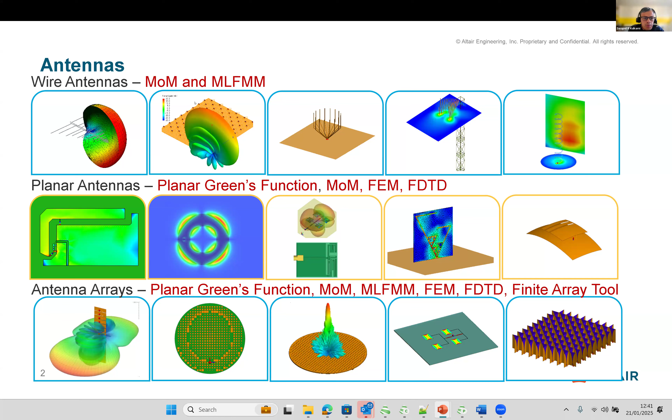These are more realistic antennas, I would say, right from your reflectors. Bear in mind that even today, most satellite communication is heavily reliant on waveguide, because you inherently have to pump a high amount of power down to Earth and vice versa when it's received, in order to amplify. Of course, patch antennas are definitely used, but they have very limited and restricted usage, and they're preferred only in certain frequency bands.

So you might have heard these terms, payload and other stuff, but inherently the satellite is designed for a certain payload. Payload is a very generic term - don't mix it up with the actual weight. It essentially caters to what bandwidth is going to be used, with what frequency.

So you might have heard that some of those are GEO, LEO, or geosynchronous satellites, etc. However, each of them will cater to a specific band: S band, C band, KU band - or different KU bands may not be used, my apologies - but VHF, UHF, yes, they are used, and then X band is very common. So based on the payload, the bandwidth, and the frequency it's going to cater to, and whether it's purely for a civilian approach, surveillance, or military.

Yes, different kinds of antennas will be used, but by and large, this is a fact that at least in SATCOM, and even on the receiver side, you'll still find conventional antennas. Of course, a lot of innovative engineering has been deployed, and there are different numerical solvers used to design and simulate. You of course have to move at the end of the day to fabrication.

That's a different aspect - I'm not covering the fabrication part because I have very little experience in it. I did a lot of designing and fabricating actual antennas in the earlier days, but now I've lost a bit of touch, so being very transparent and honest about that.

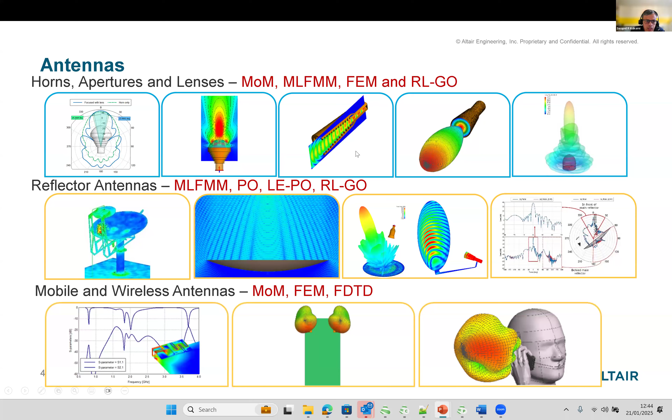Let's move to a more realistic term. It's a known fact that if you design something, unless you are a very good designer or engineer, your specifications rarely match the exact end requirements. So you will have to optimize it - work out certain design variables and see how these things fit into the real world requirement.

Let's take a classic example of a basic element of a satellite, which is an antenna. It doesn't matter what it is - are you looking at a patch, an array, a simple dipole or a monopole? That doesn't matter. What you typically do when you design a system - let's say even if it's a rectifier or a power converter - the reason I'll cover this, going off topic a bit, is very few people are aware that in satellites, power management is very critical.

If you are aware, most of us are, that everything runs on batteries. But have you ever thought the battery - the critical, I won't say brain, but the neural network of a satellite is the inverter circuit. Essentially, the batteries or solar arrays harness the solar energy, it's a known fact, and then charge the battery, and the battery powers the whole system. The key fact is the battery is standardized at a certain voltage, depends, 48 volt or 24.

However, none of these digital or analog circuits or other devices on the satellite operate at 48 volt. You need a power converter. A power converter is the brain of any electronic instrument. For example, take your simple handset - you need to charge this, you probably plug into your AC mains, and it has a small power converter.

Another interesting application I've seen is an alternative to conventional propulsion. I'll touch on optimization later, but just a couple of things on where the technology is moving. When a satellite is launched into orbit, it always drifts, so you have to fire thrusters to bring it into the right orbit so it looks at the right receiver station on Earth, or covers specific areas. The classical way uses liquid oxygen propulsion jets, but this is way more innovative. A couple of satellites have already started using this. I won't name who, because of NDAs, but what you're observing is essentially a high power microwave antenna. It ionizes plasma and uses it as thrust. It vectorizes this plasma through what is essentially a waveguide cavity antenna, but high power. It ionizes the plasma and uses it in a direction to thrust, propel, or change the direction of the satellite. It's quite innovative because you don't need to carry any liquid or solid propellant, and it's energy efficient.

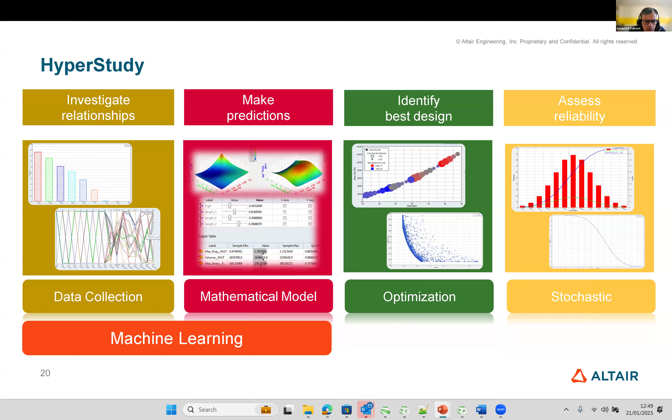Let's move on. In the interest of time I'm going to skip some things and jump directly to an example. There are a lot of jargons, but I'll go straight to machine learning, specifically in the electronics and electromagnetic domain.

You might have heard this term here and there, but the question really is: what is it?

Sorry, any noise or questions? My apologies, is it just me, or is anyone hearing background noise? Okay, that looks fine now.

Instead of using complex terms and jargon, I'd prefer to work with a simple example to understand what machine learning means in this context. I don't want to use the regression model and everything. Give me a couple of seconds, I'm just going to skip this.

Let's take an example of a very simple, basic antenna. Doesn't matter at what frequency. A patch antenna, since people nowadays fancy them a lot. But believe me, in the real world patch antennas have very restricted bandwidth and limited usage. Not that they aren't useful—if you're looking at low power and medium range devices, you'll find them everywhere. Rolling back, let's say you've designed an antenna.

I'll also come later to a circuit example, and it has some XYZ performance. When you design something, you have design variables. These could be anything: the physical dimension of the structure or electrical parameters. For example, if you're designing a Colpitts oscillator, you're looking at your resistor and capacitor values, or your required output, your sample, how you're looking at the square wave, the sampling rate, etc. Similarly, for this antenna, there are design variables: the physical dimension as well as the electrical or electronic parameters. It could be things like what is my transmit power—let's say this antenna is radiating 30 watts of power, for the sake of argument.

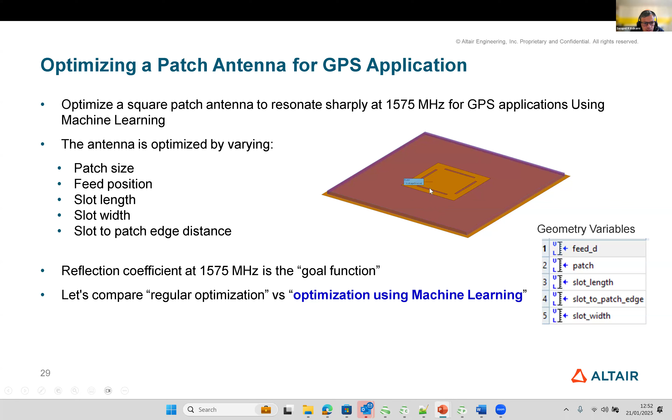Rolling back, this design has a couple of design variables, which is the patch size—the length of the patch, width of the patch, and where exactly the feed position is. In the real world, most antennas are coaxial fed. It could be fed through a classic coaxial feed, or using an SMA or BNC connector, whatever—that's not the point here. What you're looking at are the dimensions of the antenna: the length and width, or the length and width of the slot, length and width of the antenna, and the slot-to-patch distance. Now, when you do an optimization, you can use different tools.

We have something like HyperStudy, but you can find any tool which does multivariable, multi-parameter optimization. This is what the industry looks at or is in practice. What we want to look at is, out of all my design variables, which of these have maximum impact on my design.

So in this case, you prepare your CAD model of the antenna and give it to HyperStudy, whatever tool. You just say, please do a design of experiment. DOE is nothing but you launch multiple simulations, or you can do multiple calculations by hand or by MATLAB, either way, or use a simulation tool.

It's entirely your call. And what it does, with a number of calculations or simulations or your own MATLAB code iterations, it essentially does a wide variety of combinations of values of design variables, be it patch slot length, slot width, patch dimension, or feed location.

So you can imagine if you have just two design variables, you have a matrix of 2 by 2, which would be 4 simulations, or 4 hand calculations, or 4 of whatever MATLAB or code you want to use. Now imagine if you have 5 design variables, your matrix should be at least 5 by 5, isn't it?

So you will have at least 25 designs of patch antenna, wherein you will have different dimensions of patch size, slot width, slot length, etc. What the optimization engine does is tell you, look, out of all these 5 design variables, there are only 2 which have maximum impact on my S11 or return loss. The other design variables have least impact, just ignore.

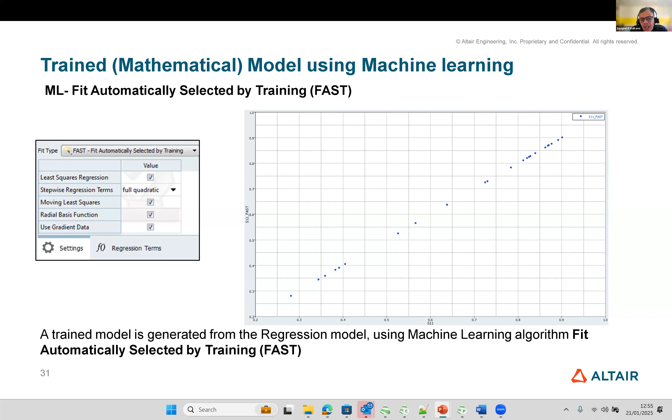Let's say you can argue that we already have an existing antenna system or a transceiver, and this is how it has performed. You can come back, get the measured data, feed it into the optimization engine, and what it does, it will train. Let's keep it simple. It will train the simulation data and generate a math model, and that is the fancy term machine learning.

But essentially it's a simple math model or mathematical equation. The mathematical equation is prepared based on extraction of data from your simulation model, or your hand calculation model, or MATLAB, or whatever you use. And what it does is generate a response surface from your machine learning model.

Essentially, it will generate a response surface and show you, okay, if I change the feed position, say from 18 mm to 25 mm, if I change the slot length from say approximately 40 mm to 44 mm, if slot width from 1 mm to say 6 mm, how would my S parameter look?

And then it will give an idea that probably just by moving the slider, instead of doing full simulations, because now it has generated a math model based on your number of simulation models, it's very easy merely by moving this slider to identify what optimum value will give the best S parameter.

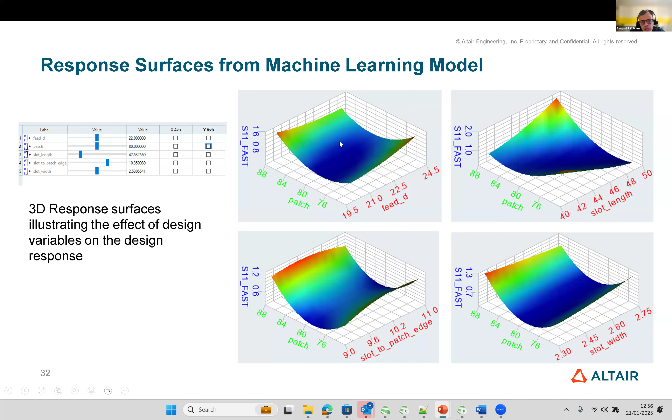The key aspect to remember here is machine learning or data science is not magic. It is purely a mathematical approach. Remember, it takes time to solve say 25 models with different dimensions of your designs. In this case, it's a simple patch antenna. So obviously you spend a finite amount of time to solve those models and then extract the data from those solved models. So you might feel that it's magic, but it's not magic.

If you do a conventional optimization, you could see it will take probably 8 to 10 seconds because it's a very simple patch antenna, and believe it, this is on an infinite ground plane. None of your real world structures are on infinite ground plane. Unfortunately, the textbook learning, what I learned, even that has changed.

All of the examples they talk about show very nice, beautiful responses and curves, but they are mostly based on an infinite ground plane. That is never the case. All of your real world antennas will have a finite ground plane, and it's very important to consider this when you design or solve for this aspect.

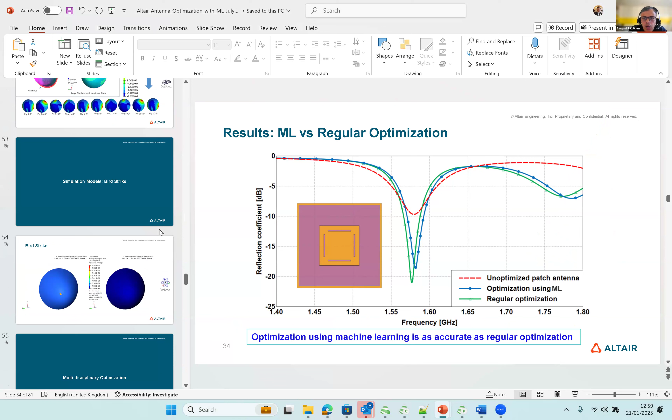I'm going to stop here in the interest of time, but that's what I wanted to cover: how multivariable, multi-parameter optimization is used to achieve real world results. Now I'm going to minimize this and move on to the next topic. Bear with me for a couple of seconds, which is critical because I have to cover that, and then, in the interest of time, I'll cover some other stuff.

Here I am. Yes. So the other aspect, before I move to satellite connectivity, is how does satellite communication work?

One would argue the signal is relayed from a base station antenna up to the satellite, and if it's within the range, coverage area, or what we call footprint or power flux density threshold, the signal will be directly transmitted. If not, it will be relayed to a second satellite and then down to the Earth's surface. Unfortunately, things are not that easy.

There are different tools available to define satellite networks, but you need to first understand how propagation occurs within space. Your signal gets attenuated at different levels based on what frequency you're using and what kind of satellite network you're dealing with - is it LEO, MEO, GEO, or GNSS. With GEO you're talking about 36,000 kilometers away.

That's a different story. But in general, the signal is relayed from the Earth's surface, say point A - any location A or XYZ - up to space and down to your receiver station. There could be a case where more than one satellite is involved, for long distance communication like transatlantic calls, which is very common these days with people traveling. If someone initiates a call from one location and it needs to reach somewhere in Germany, obviously it's not a single point to point connection - your signal will be relayed through at least one satellite network to another.

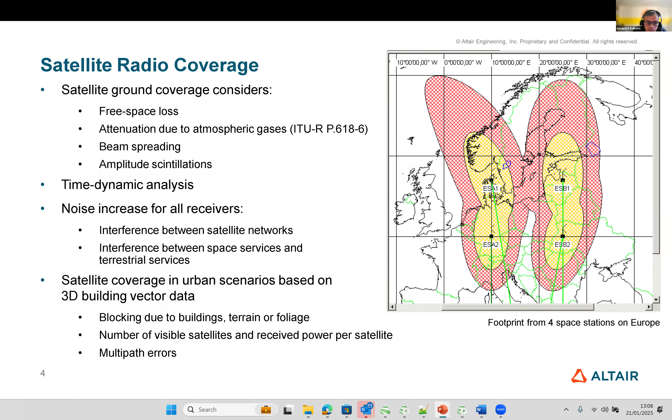Remember, when you transmit a signal and it's relayed down to a desired location on Earth's surface, it's not through just a single path. It's sent through multiple paths and then, rolling back to multiplexing, is made into multiplexing and demultiplexing. That's what occurs in real world communication channels. So multipath errors are bound to happen. How are you going to tackle that? There's a lot of industry focus on how to tackle multipath errors and reduce noise. Those could be other topics.

Another aspect people clearly ignore is that look angle is very critical in satcom. The look angle is essentially the angle at which the satellite looks down to the ground. If it decreases, obviously the distance between transmitter and receiver increases, and your path loss will increase as a result.

You want the least amount of path loss. Path loss, I hope you're familiar with this term, but it goes literally by its name. Let me make it simpler with an acoustic example.

When you speak, however high, a human voice has a limitation. I can speak at a certain magnitude, I can raise my volume, I can go to the peak beyond which I can't shout louder. So my voice would travel maybe 200 to 400 meters at most, and after that it ceases, it dies out. The same occurs with real world wireless or electromagnetic signals. There's a path loss associated. Your signal may reach beyond a certain number of kilometers, but if it falls below the noise floor or noise threshold, it's just noise. If your received signal strength is less than minus 90 dBm, it's just noise.

You can't demodulate or decode the original information back — it's just lost. Another aspect is the distance between the satellite and Earth station: if it increases, your path loss logically increases. What if your angle decreases? Then your signal path will increase. So there's always a golden balance you need to strike on the look angles.

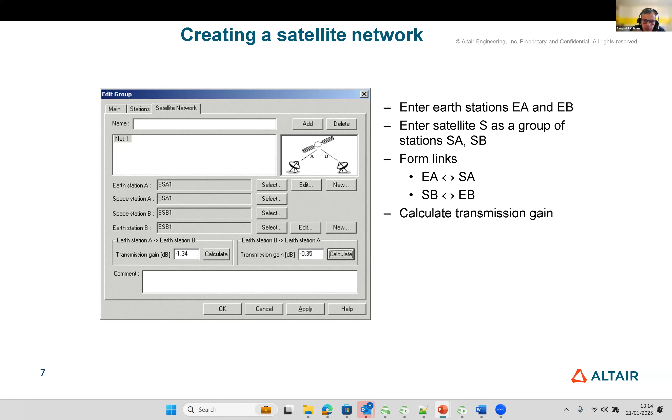You need to be mindful, first of all, to define things like: what is the transmission gain? What kind of satellite am I defining, is it GEO or MEO? What is the transmit power? What frequency band does it cover, etc. So you need to populate that information first, and then it will help you calculate the transmission gain, and so on.

I think I need to cover the space-Earth propagation aspect. There are a lot of losses, I'm talking in context of satellite networks, how they operate and what aspects you need to consider. Free space loss is inherent and occurs everywhere. Attenuation due to atmospheric gases. I already talked about beam spreading. What's important is there are certain ITU standards you need to follow if you want to implement your own codes, or even if you're just using off-the-shelf tools.

When it comes to space to Earth propagation, I'm saying now downlink. Uplink is where you send a signal from, as it goes by name. But again, it's not a hard and fast rule. Some people, or certain engineering nomenclature, argue that it's not hard and fast that an uplink signal should always be from Earth to satellite, and downlink could be vice versa. So I can't take my words back, but just be very clear that I'm talking right now more to downlink, which is space to Earth.

So you need to identify whether the space station is visible from a point on Earth, and how the refraction is tackled. Then there is a very specific ITU specification for diffraction, which is very valid because your Earth surface is not, yes, I mean, we all know Earth is not exactly spherical, but it's slightly flattened at the top and kind of an oblate shape. So yes, there are certain formulations.

When it comes to satellite coverage, what we really look at is the footprints. Bear in mind that a satellite covers a few hundred to a few thousand square kilometers of area, not a tiny bit. In that case, the way we measure the coverage is in terms of power flux density contours.

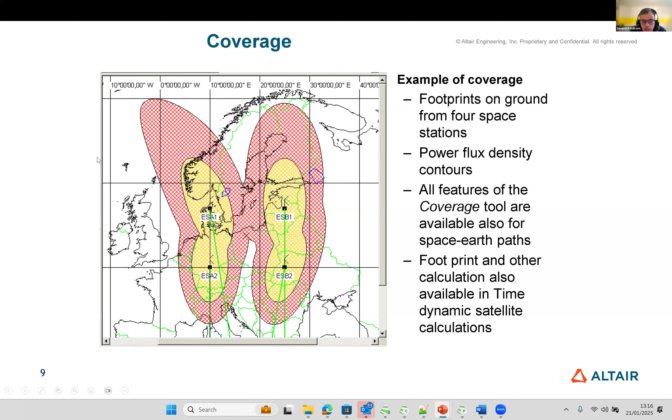Okay, so we have some coverage tools. The footprint calculator is available in static condition as well as time dynamic. When I say time dynamic, what does it mean? Hold on, before we deal with anything, I just want to run a simple, more realistic example.

What I'm showing here is I'm trying to solve a real world problem wherein I want to deploy a receiver which should handle the worst case scenario or any natural calamities, but should always be in line of communication. It might happen, in an unlikely situation, that if you have an earthquake or flooding or some natural disaster, the first and foremost impact is on your communication system. They go down, or you will have a patchy connection, and that's where SATCOM is very reliable. However, you want to ensure that if you want to relay key warnings or key communications, the key communication system should be up and running.

So if you look across the globe, this is very common: you will have some non-disclosed sites wherein certain receivers are deployed, which have round the clock connectivity to satellites that are moving, depending on LEO, MEO, or GEO.

What I'm showing you now here is a receiver deployed at XYZ location, but observe carefully. I'm now doing a time dynamic simulation or calculation where it shows that over a period of the next 60 days, or 90 days, or 1 year, I want to ensure that irrespective of whichever satellite it's looking at, my receiver should receive, or be in communication, and shouldn't lose communication with the satellite. You can select whether I'm using a GPS band or LEO or GEO or whatever.

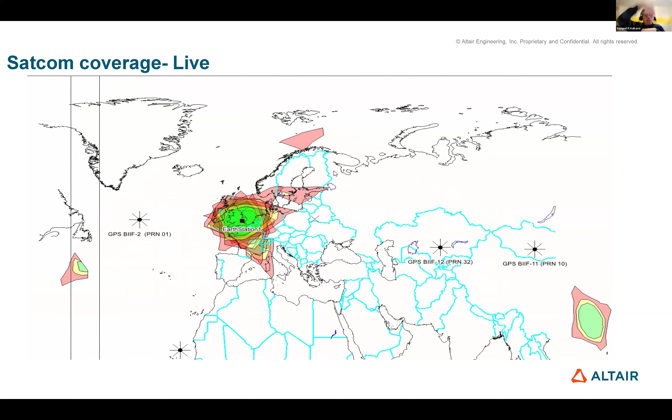So this is for a brief period, the frame rate is accelerated, but this is done for 30 days and it shows which satellites are visible. Because obviously, your Earth control or receiver station is fixed, your satellites are rotating around, so what satellite it will look for at a specific time and day duration will change, and it gives an idea of how the real world works.

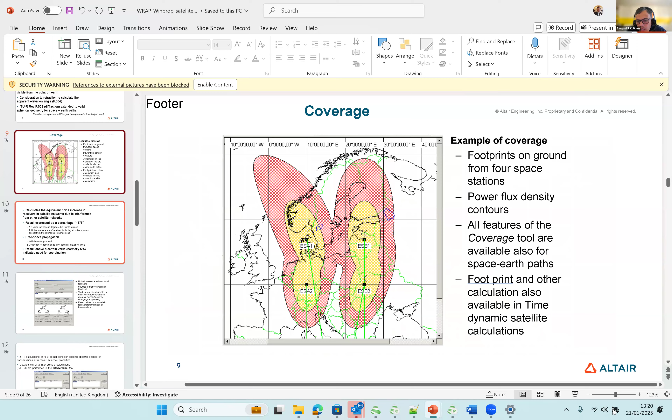What I haven't covered so far is interference and noise. You might question, is it really like this, because in the real world you will find a lot of noise which will garble your signal, or interferences, wanted or unwanted. How will you tackle the noise? The only way is to work at the receiver side. You need some filtering. Filtering is a very generic concept, but let us be precise, being engineers. You might have heard terms like band pass filter, band stop filter, does this resonate? What is filtering?

Any one of you can unmute and answer. Feel free, or I'm not sure who has the admin control. But does this resonate? Does this make sense, what I'm speaking so far? Yes, it's fine. Okay, thank you.

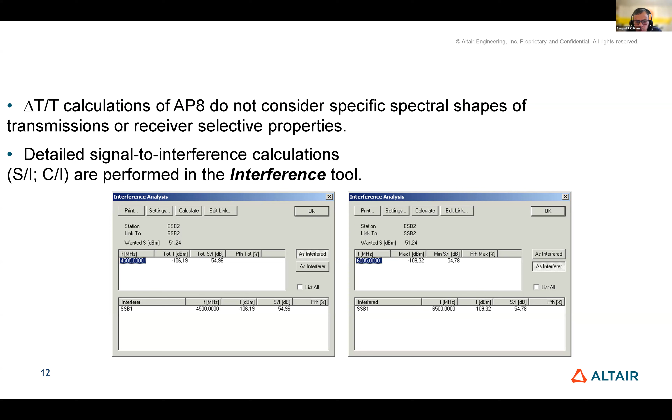However, when we talk about interference, you need to define two aspects: what is the transmit power, and what is the receiver sensitivity, in the simplest context. Then you need to calculate what is getting interfered and what is acting as an interferer. Once you know that, you know who's the culprit and who is the victim, and you can work around to place the corresponding filtering characteristics.

I'll skip this, not required. So the question we've been talking about so far is, I haven't yet touched on how we consider the received signal from the map data point of view.

Irrespective of when you talk about satellite communication or satellite network, you will at least hear these terms: geomap data, because obviously you can't measure physically going across the globe. The way we do it in designing is you need to consider your map data, your terrain profile data, and attenuation based on water mass bodies.

So to put it in context, let's forget about what's at the header. If you imagine it's an array antenna, and you are transmitting some signal down to earth, your main beam will undergo diffraction, scattering, reflection, and all of these aspects.

This is governed by your terrain profile and the conductivity of various atmospheric regions, and that's why it's important. So typically what we do is a link calculation or link simulation in satcom, and it depends whether you're trying to use the satellite service for urban outdoor scenarios, indoor scenarios, or military aspects. That's a different thing, but you need to consider all of these aspects: what is the number of visible satellites - I covered that - what is the power per satellite, how is the multi-path error tackled.

I'm not going to show a couple of examples, but what I'm looking at specifically is this important aspect. If you're dealing with satcom, you will always end up with this term: jamming. I'm just taking an example of GPS jamming, but it's not necessarily that - jamming is involved everywhere, for both wanted and unwanted purposes.

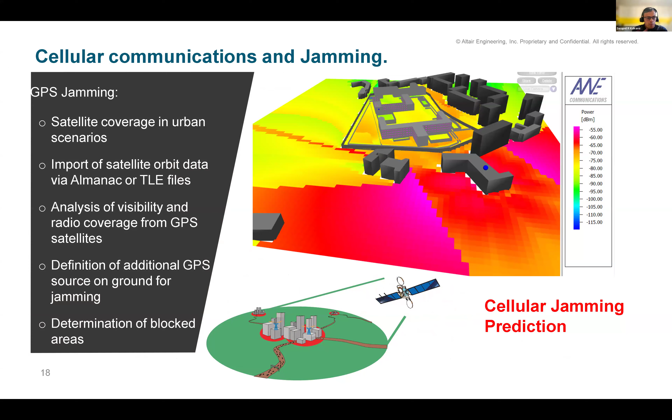One aspect is what essentially jamming does - you try to transmit on the same frequency and same band, but the key aspect is you need to know the modulation, and that's where encryption and decryption comes into play. I haven't covered jamming in detail, but if you're interested, drop me an email and I can share some open source literature on that aspect.

I already showed you this simple video, which essentially demonstrates how the industry tackles time dynamic satellite simulation, because you need to understand how in the real world your coverage or interference is going to work. I haven't even included the interference scenario in this case, but yes, it can be included.

Now, in the interest of time, let me check if I've missed something. Yes, on the interference side, please be mindful - I should have covered this before. Sorry, I'm jumping between slides because the topics are quite vast. You need to consider co-channel and adjacent channel interference - there are a lot of aspects, including intermodulation effects, image frequency, and harmonics.

You need to wonder about what is your transmitter spectrum - is it overlaying into another transmitter spectrum from another satellite operator, or even the closest frequency band? There's a very famous theorem from my engineering graduation days - can anyone recall that theorem? Nyquist criteria. Yes, Nyquist criteria.

Believe me, Nyquist criteria is still used and valid specifically for satcom, but even in general communication blocks. Receiver blocking and receiver selectivity is another topic - if anyone is interested, you can pick that up, there's a lot of work to be done. There has already been some work done in the past, but we joke in our industry that if you want to really mint money in millions, just work on the receiver side, because while it's saturated, a lot of things haven't been resolved there.

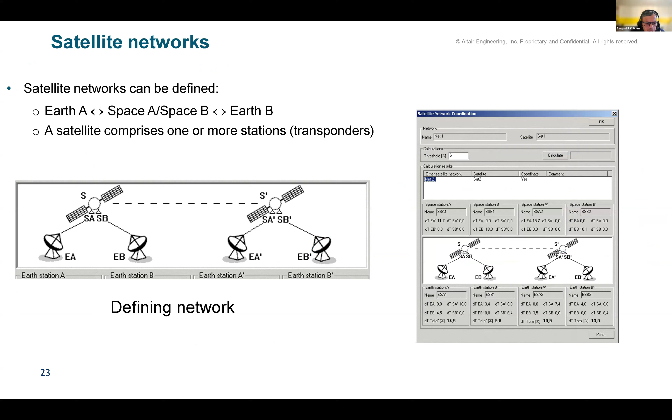So again, I'm just being mindful, looking at the watch I have set up on my screen.

So these are the very high level aspects I wanted to cover on the satellite network. Again, this is not everything. It's just very high level.

So what I'm going to do now is roll back to another aspect of this, something on the battery. We haven't covered anything, as I mentioned, so I'm just going to roll back. This is something I worked on in the past - battery management system for satellite.

As I said, human beings, animals, mammals, any living creature - there's a saying... rolling back, sorry, excuse me, my PowerPoint is behaving funny. I'll leave this as it is. Ignore the tools at the bottom.

What I want to show here is the most critical aspect: how are you going to tackle the battery system or battery management system. It is very key. If your battery dies out, your satellite stays in orbit and it literally becomes what we call space garbage. What you might call space garbage or space junk is nothing but satellites which have died away.

This is the most critical part in satellite communication, I would say, and also the most ignored. Unfortunately the syllabus doesn't cover how you're going to handle the battery. Your end goal - now you might be familiar with EV terms, everybody's talking about electric vehicles and such. By and large the physics applies the same.

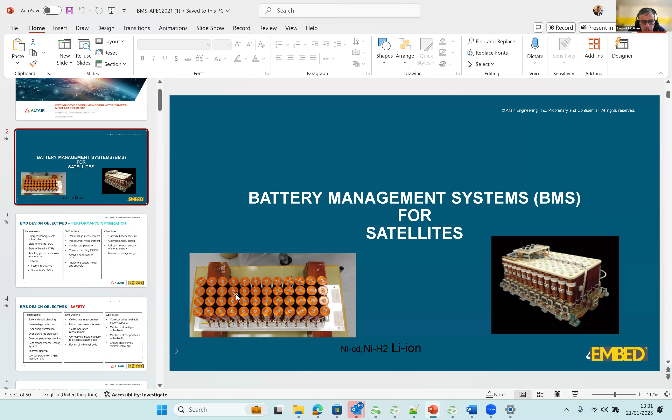What is not standardized is up to the end user as an electronic engineer - how are you going to stack those batteries? How are you going to charge them? What kind of inverter circuits are you going to use in order to optimize the performance of your battery pack so that it lasts?

For say the next 4 or 5 years, and everything is very design critical and sensitive when it comes to satellite, because once it's launched, it's on its own. You can't - there are very limited options where you can physically send something and fix it. It has to be automatic. There's a hard reset and soft reset, but that's how it should be.

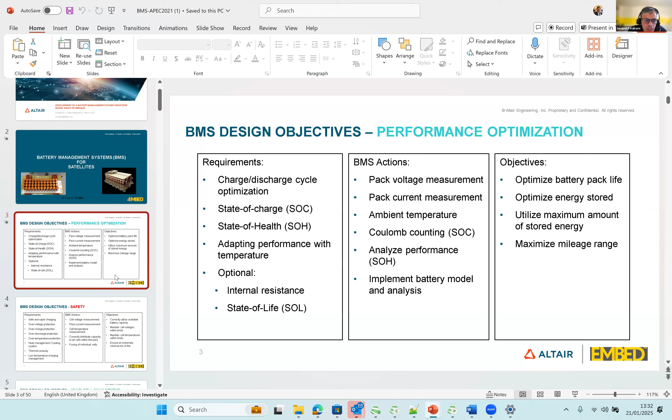So when it comes to battery management system with satellite, it's critical for performance, optimization, and safety. How are you going to consider rapid charging? You need over voltage protection, over current protection, over charge protection, and also over discharge protection.

Remember, the battery is driving some load. That load could be anything - it could be a demodulator, modulator circuit, or it could be the antennas on board. It has to transmit as well as receive signals. Obviously that requires an inverter circuit which will convert your standard battery DC voltage to some 48 to 12 volts, whatever, and vice versa. There will be certain equipment.

Yes, a satellite does work with certain electronic equipment which will work only with AC - not everything is DC. So you'll need an inverter from DC to AC as well. So obviously whenever you talk about DC to DC conversion and DC to AC, there is certain loss. We don't have a 100% efficient power converter. Otherwise, if you knew how or could invent one, you would definitely mint a lot of money.

Rolling back, how are you going to work on multi-cell management? Remember, in the real world we talk about a battery pack, but the most convenient way I don't have...

I just dissected a power bank. I'm not promoting a specific brand, but I had an Ambrane power pack that went bad. Being an electronic device, I decided to open it up. There was just a loose connection, some few solder dots. I replaced one of the resistors, very standard, and it was up and running. I believe in recycling, but that's a different story.

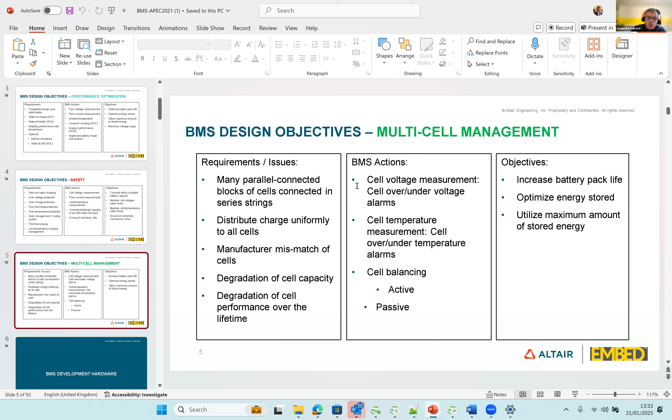Rolling back, remember, it doesn't matter if you are looking at a battery of an EV vehicle or one in a satellite or wherever - it is never a single pack. It's always individual cells arranged in a particular fashion that gives you the desired voltage or current required to drive your system. Now, what we use in-house is our embed code.

It has a built-in GUI, and you can use any platform. You can literally use JTAG - in my days, I used JTAG. Nowadays, everything is USB and peripheral. You can use a USB connect to Raspberry Pi or microcontroller to develop your in-house battery management system.

What you need to be mindful of is specifically how you are going to tackle multi-cell management. I'll skip something in the interest of time, but there are a lot of off-the-shelf development boards and microcontrollers you can use. I'm not promoting, but the most reputed are Texas, Infineon, ST.

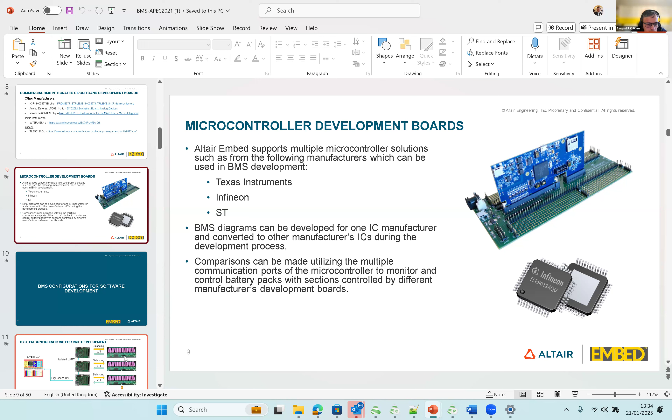But as a graduate, or if you want to work on your BE project, master's project, or even PhD, you can pick up a Raspberry Pi, cascade a couple of them, and build a battery management system. What I want to show here is the important aspect you need to consider: overcharge protection, under and over discharge protection.

So what we have with embed is just a tool - you can use any tool. Honestly, you can Google battery management system tools, there are a lot available. From what I've used in my projects, this is the embed GUI.

You just launch its installer.exe, and what it does - I typically prefer it this way because it's more easy to diagnose. Believe me, designing is a different aspect, but diagnostics is way more painstaking and time consuming. So what I'm doing here now is...

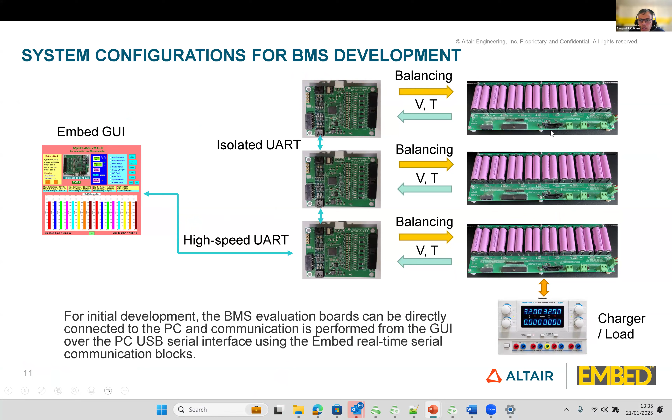Essentially, I've developed a GUI, an embed GUI. Through a UART or just through the USB interface, I can connect to my Raspberry Pi board - in this case, a Texas board. Conventionally it was through JTAG, but now we allow it to communicate through any high-speed UART or ISO UART. Is anybody here from an embedded background? They can easily relate to what I'm talking about right now.

So what I'm saying is you can develop your own simple, simplistic form of battery management system. You can interface with embed and try to understand - okay, if I'm now charging with say 12 volt 500 milliamps or 16 volt and 800 milliamps, this is just my setup in the lab. You can ignore it, you can use any vector network analyzer or anything.

What I want to show here, most critical, is when your battery is charging, what you need to monitor, as easily available, is the individual cell voltage you are monitoring, also the temperature while the battery is getting charged, and vice versa when it is discharged. The reason I'm covering the battery management system is: what if a fault occurs? Let's say a particular individual cell is not charging, or it's charging very slow, or maybe the temperature is rising very fast.

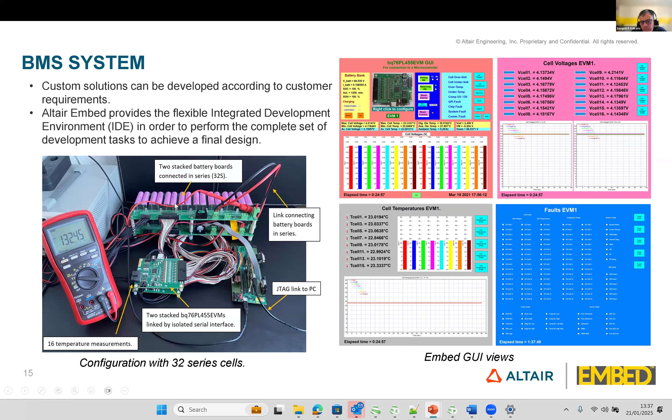That is where we have fault EVM detection - it will pick up and literally blink a red dot in front of that specific cell. Now remember, this is a user-defined arrangement. So you might wonder why there are so many cells displayed on the Faults EVM GUI, whereas here I'm just showing probably a 16 by 1 matrix or 8 by 1 arrangement. This is a prototype board, and as a student I would probably love to work to define my own cell arrangement, my own configuration. So embed has a GUI.

You can use any microcontroller board, be it Raspberry Pi or Pico controllers - there's a lot available in open source, or professionally then Texas and other stuff. So that's what the GUI does. As I said, it will allow you to monitor the temperature while the cells are charging, also as discharging. You can also add an external load to force discharge with a high current.

Let's say there could be a requirement of certain communication systems to pump high power. Obviously, in that case, it will draw more from the battery or discharge it for that specific device. So you can change the load and see what happens if the current is, or the battery is getting discharged at a higher rate. In that case, is my temperature rising? Is it ambient, is it okay or not, etc. That can also be worked around.

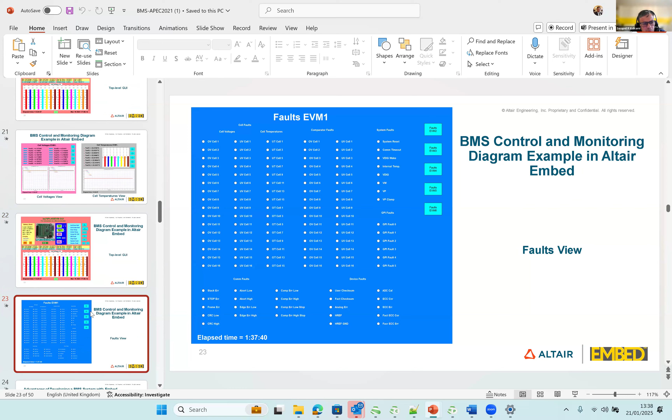Any questions, or has anyone of you worked on battery management systems, or is that not a consideration at all? It could be a topic of interest if you want.

This is generic - your battery could be used for a drone, for an EV vehicle, or any hybrid powertrain, or even satellites, which purely operate on batteries. But this is very high level stuff I wanted to just cover. Does that make sense? Anyone can comment - is it relevant, or just keep it at the back of your mind? You can work on this engineering aspect as well. I'm not going in detail, but there's a lot of stuff.

What I want to cover now, the next topic, is something on power converters - the system power supply design suite. My background, my graduation project was on this, I'm not sure if Professor Mangate is still there, but he was my guide back in 2006, and we made some ultrasonic motor. Probably we even won some IEEE prize. That's long back, almost 18 years ago now.

What is critical I want to mention here is a lot of people completely ignore this and just jump into VLSI. We do work on defining the gate layout and diagnostics at the gate level and RTL level, but I'm not covering that in the SATCOM context. What I'm covering is the fundamental aspect - the power supply design suite. Have you ever wondered how the power supply is designed for individual equipment operating on board a satellite?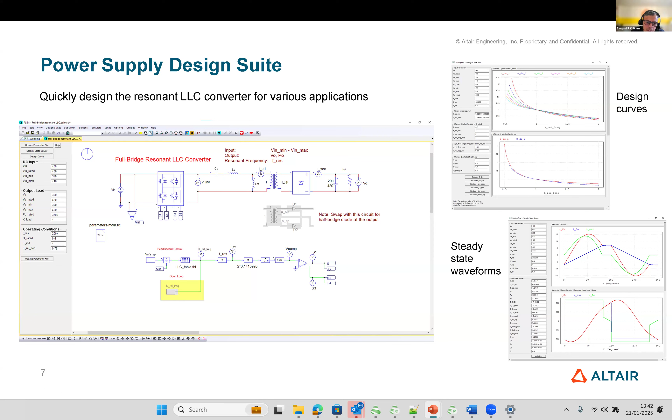That's where the industry is driving low power efficient, or power efficient converters, put in simplest terms. Second aspect is how are you going to tackle your EMI?

I haven't even touched EMI, EMC is a big problem, and there are very few experts, even within a specific geographic region or specific industry. When I talk about EMI, it covers radiated emission, radiated immunity, and conducted emission. For now, let's stick to conducted emissions since we're dealing with circuits and power converters.

So let's say you design a DC to DC converter. However, the first question, at least in SATCOM or anywhere, they'll ask is, is it complying with CISPR 25 class A, B, or C standard, whatever it is? And then you would argue, well, how do I know?

The classical way is you prepare a breadboard. I remember in my engineering days, there was... sorry, excuse me for the burp, I haven't had my lunch yet, I've just been back-to-back meetings.

Rolling back, what I mean is network lines, there was a subject, network and lines or network theory. You used to prepare breadboards, prepare basic circuits, test, and look at the output. However, if you don't have access to any simulation, emulation, or design tool, the only way left is, but be mindful, it is very hard to prepare a breadboard kind of circuit or prototype because you need to physically source devices, the resistors, capacitors, IGBTs, get them prepared, and send them to a test lab.

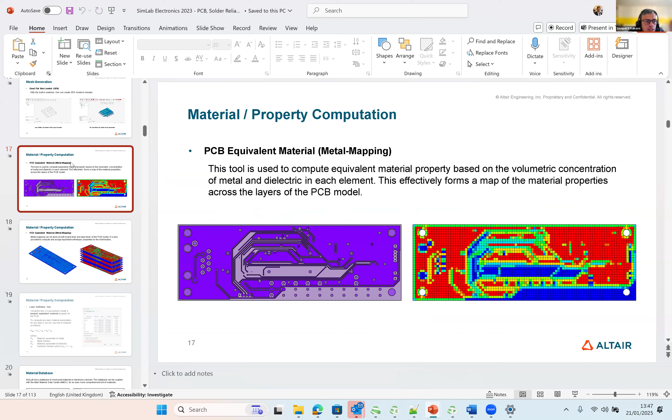What I want to cover, an important aspect I haven't so far - yes, I have designed PCBs in my job role a lot, but the most ignored term is signal integrity, power integrity, and that's what I deal with as an electronic engineer. The most important aspect when it comes to satellite communication is the multi-physics optimization of your PCBs. This is a completely ignored aspect, but if you go to industry and want yourself to be employable, hireable, whatever companies have available, especially within the engineering domain, believe me, they will ask have you any experience or have you dealt with anything with multi-physics on electronics?

When I talk about designing PCB, you have a number of tools and they are very well optimized. You can just say I want to design a PCB for signal conditioning or an audio amplifier or class A audio amplifier, and the PCB design tools are so mature these days - they already have AI introduced wherein it will give a nice layout track, and then it's the user's call what hardware he has to use.

What I'm talking about specifically is the combined performance of your PCB - structural plus thermal management. So these are the aspects considered in satellite design. Remember, your PCBs which are used in satellite are subjected to very stringent standards, because imagine when your satellite is launched, it is subjected to very high stress, strain, and centrifugal forces.

It has to sustain those, so they use potting material, and it's very key to understand what kind of stress and strain will be subjected to your PCBs. This is the real world engineering aspect - how are you going to tackle steady state heat transfer, transient state heat transfer? I understand if you're from an electronics or electrical background this may not be relevant, but this is where the industry requires multi-physics simulation.

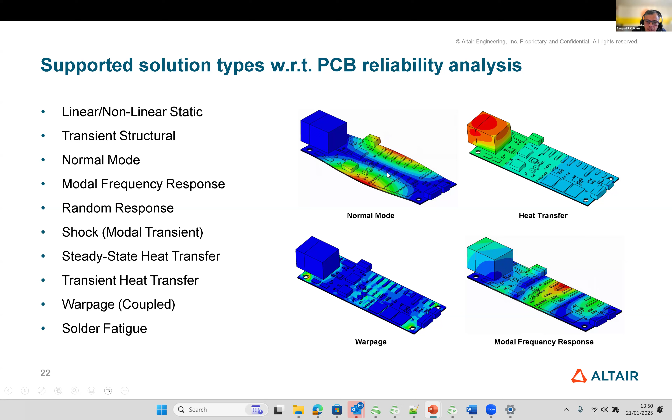So probably you might ask, why am I bothered, why am I connected to this? You are, because if you are designing a circuit, there could be scenarios where one of your resistors or capacitors goes off or dies - it may be an open circuit or short circuit - and there may be a sudden current discharge over this PCB trace or netlist, which may further hamper the original performance of whatever circuit you've implemented on the PCB. In that case, it may generate a local hotspot and bend the PCB. I'm not touching those aspects deeply, but believe me, what we deal with at the engineering level is solder fatigue.

So a picture speaks more than words - I'm just going to show you one slide. Yes, we've all seen PCBs in the real world, but have you ever wondered, if it's a microprocessor, how the pins are connected? If it's a simple NAND or NOR gate chip, say 8 pin or 16 pin, that's a different story. But look at the engineering aspect.

These PCBs and devices are subjected to very high stress and strain when they are launched into space. Once they are in space, that's a different story - you have vacuum and there is no way for convection. The only way heat dissipates is through radiation a little bit, but not conduction and convection.

So you need to be mindful of how you're going to tackle those thermal aspects of the problem. Bear in mind I'm referring to the thermal problems created from electronic circuits - it could be a high surge of current or voltage, or an unbalanced load, and the resistor or capacitor just dies off. That's where this thermal hotspot gets generated due to high surge of current and unbalanced voltage. I'm just showing different configurations.

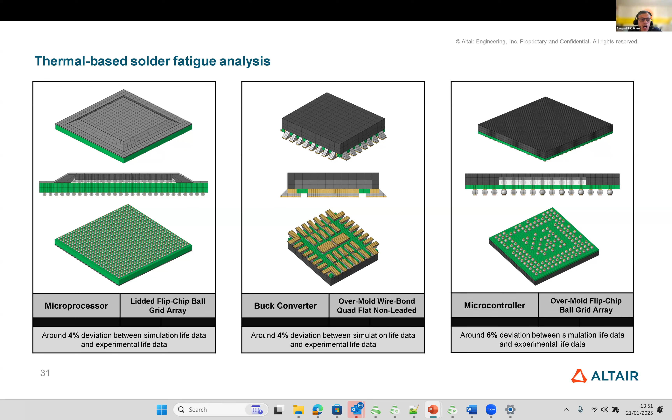Of course, don't worry about this complex engineering problem - you can start with something very simple. But what I'm saying is, at least in satellite networks and satellite communication, this is a very critical requirement: how would you tackle EM plus thermal, or electronics plus thermal problems?

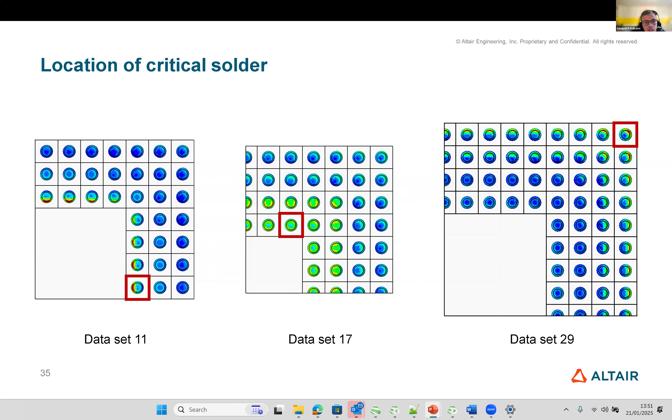So we use a tool called SimLab - there are a lot available globally. The critical thing is you need to predict the failure criteria: what could be the conditions, or after how many operations or cycles, or switching on and off, or the clock cycle of a microcontroller operating at a certain clock cycle, after what span of continuous operation you may have a solder fatigue, or a solder may fail, or your PCB or IC may die out. So you need to predict that.

It's called predictive analytics. It's very common in manufacturing. Historically it's come from the automotive manufacturing environment, but it's also now relevant for high stringent engineering equipment, specifically electronic equipment and designs and PCBs used for satellites, as well as any MIL standards.

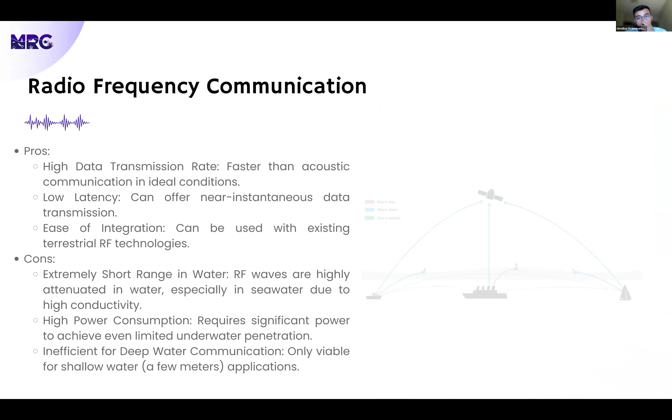Moving to the next one, we have radio frequency communication. The basic concept is that it uses electromagnetic waves to transmit data wirelessly underwater. In the air, radio frequency waves can travel long distances, but in water they are rapidly absorbed, especially in seawater, because seawater has high electrical conductivity. That's why radio frequency can only be used for short range applications.

The concept is simple: an antenna transmits an electromagnetic wave, and the receiver detects these waves and deciphers the encoded data. This data needs to be modulated using time domain multiplexing, frequency and phase variations. If you look at it from an analogy perspective, it's similar to a Wi-Fi or Bluetooth signal, but much weaker, because underwater there's high resistance to radio frequency waves, so it can't send a huge amount of data.

One really good application of radio frequency is AIS communication. The way we have GPS in mobile devices to tell our exact location, at sea we have something called an AIS transponder—an electrical device fitted onto every ship. There's an IMO guideline and recommendation stating that every vessel of 300 gross tonnage and above, like large cargo vessels, must fit these transponders. These transponders send information about the ship to a lighthouse.

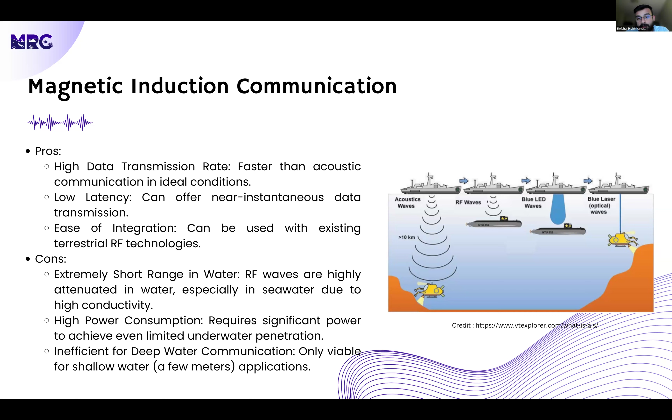The idea is that a transmitter coil will generate a time varying magnetic field, and the receiving coil will essentially detect these changes and convert them into electrical signals. Think of this like wireless charging on our phones - we keep the phone on top of a wireless charging mat, and one coil generates a field while the other coil picks it up. That's pretty much the concept behind magnetic induction communication.

So the core of the whole industry, in terms of the most used communication method, is acoustic communication. Acoustic communication basically uses sound waves to carry information through water. Unlike light, sound propagates much farther in water than all the other forms of electromagnetic waves, and therefore it is the most widely used.

It's also good to note the speed at which sound travels - if sound travels at 300 meters per second in the air, it travels at 5 times that speed in water. So it travels much faster in water as compared to air, which is nearly around 1500 meters per second.

It essentially works for both low frequency and long distances, and it also works at high frequency. The distance gets shortened because the frequency is high, but both can be used. The way it works is that a transducer, basically like a speaker, will generate a sound wave, and these waves propagate through the water and are picked up by the receiver. The data you want to transmit is essentially modulated using amplitude, frequency, or phase variations.

If you want to look at it as an analogy, you can look at it from the perspective of whale songs or sonars. If you look at the sonar ping, how the signal transmits for a long distance without being detected, that uses acoustic communication.

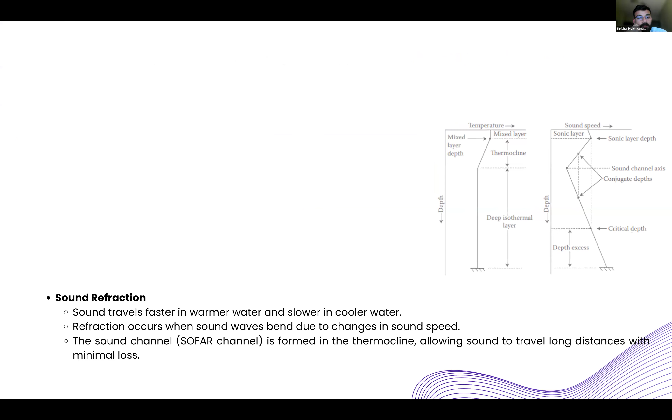So this is a representation of what I was talking about, how the speed of sound looks like across a water column. As you can see, initially there is a sharp decline in the speed of sound. This is because there's a decrease in temperature.

At a point of, let's say, 1,000 to 1,200 meters, pressure starts kicking in. At 1,500 meters is where the temperature hardly decreases at all, and therefore the pressure starts kicking in and becomes the more dominant factor. The sound speed now gets controlled by the increase in pressure, and the speed of sound again increases. So this is the kind of curve that you normally see.

Now this changes from region to region, but what this actually does is create different conditions for the propagation of sound. Before we move into the different kinds of zones or channels created by this speed of sound, it's important to reiterate Snell's law, which states that sound will travel at different speeds at different layers of the ocean. When the sound moves from one layer to another, the speed changes, so it bends due to Snell's law.

To summarize Snell's law, there are only two statements we need to look at: one, if the sound moves into a slower medium, going from a high speed to a slower speed medium, it will bend towards the normal; and the other way around, if it moves from a slower medium to a faster medium, it will bend away from the normal, having an upward refraction or upward bending of rays.

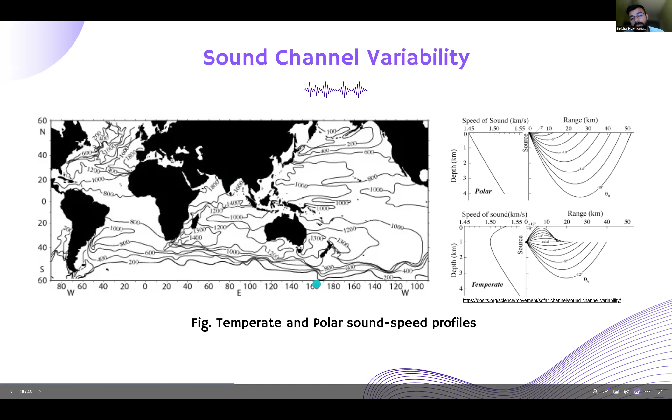Now, over the past few years, since the very inception, we've been buying sonars from Russia or most of the polar countries which actually create these sonars. For these countries, the sonar works extremely well in their region, but when we bring it to our region, we see a significant drop in the performance of the sonar. That is not because of the sonar that has been built, it has more to do with the environment in which we are actually deploying that particular sonar.

In polar regions, where the temperature is extremely low, the kind of SOFAR channel we see here, or the surface duct channel, gets created at a very low depth, meaning you can deploy a submarine at, let's say, 250 meters of depth and get that kind of efficiency in your sonar. However, for the Indian Ocean region, our SOFAR channel gets created at 1,500 meters, and that is not a region that can actually be achieved easily.

I mean, the depth is not something that you can deploy to very easily. As I said, due to the massive amount of pressure, your equipment needs to be able to withhold and withstand that kind of pressure. Therefore, we are not able to take advantage of the SOFAR channel that is being generated there, so the sonar range for temperate regions is lower than for polar regions. That's one more challenge that we have here.

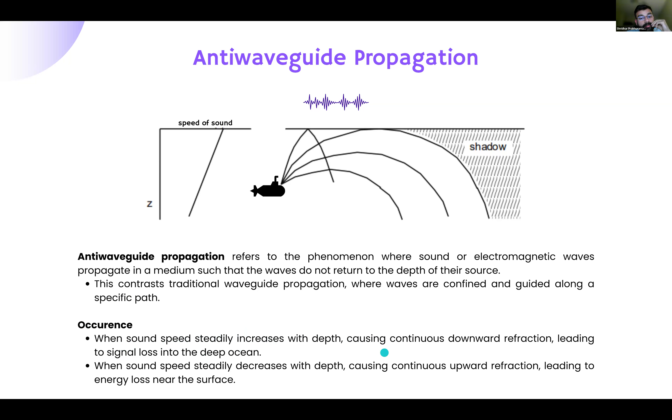As we saw in that previous example, sound speed was steadily increasing with depth, and therefore continuous downward refraction was happening, resulting in signal loss.

Propagation of sound in shallow water has a lot of aspects to cover, which includes multipath propagation, high attenuation, scattering, and diffraction. All of these happen because it's a small depth, so multiple reflections create overlapping paths. There is a rapid amount of absorption of acoustic energy, because in shallow water there's a huge amount of attenuation due to the type of sediment and mud rocks present in the region. And there's a lot of scattering and diffraction because the sea floors are always irregular, so the propagation is never going to be a coherent propagation.

Moving to the next part of the presentation: signal transmission. The environmental factors that affect signal transmission are not the only challenge we look at. The biggest challenge is the ambient noise level in the region.

There are a lot of factors that influence it. A huge amount of ambient noise essentially means we have a reduced signal to noise ratio. We have signal masking, which means that if you have a ship propeller or industrial activity happening, it is very difficult for a submarine using a passive sonar to actually detect an approaching vessel because there's a huge amount of noise in the region.

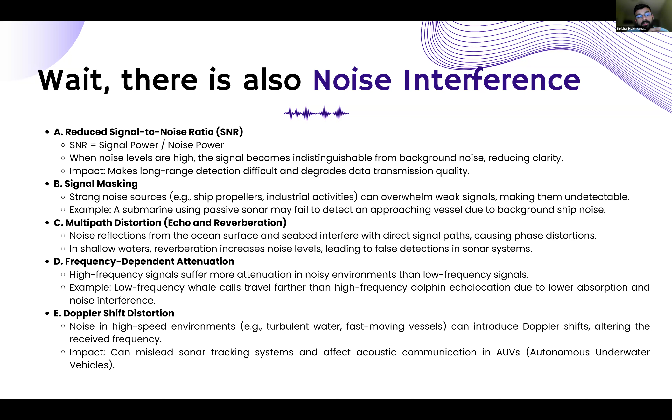When we talk about anthropogenic noise, anthropogenic essentially means human-made noise. Any kind of human activity that creates noise, like shipping, construction, military exercises, energy exploration such as oil rigs, mining, and so on, all of that creates a huge amount of noise, and that noise will disrupt any and all kinds of marine life present in the region.

Marine life uses sound for communication, and noise being generated will interfere with their communication. It gives them stress and physical harm. We've also seen a lot of whale strandings because whales cannot communicate. If there's a huge amount of noise in the region, whales will not be able to communicate or find their prey and food, and as a result they get lost and separated from the pack. We've seen examples where whales have stranded on the coasts of Goa or Mumbai and so on.

All of that is because of increased noise in the region. Anthropogenic noise can be acute or chronic, high intensity and short in duration, or low intensity and traveling long distances. There are both natural and anthropogenic sources that create noise. However, anthropogenic noise is the one thing we can actually manage and do something about, so we essentially focus on that, plus natural noise doesn't create as much interference as anthropogenic.

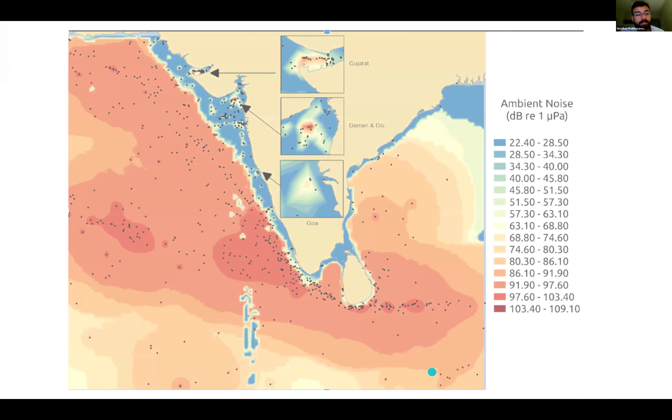This map is what we generated for one of our research works. These black dots represent vessels, and the color-coded regions reflect the noise level in those particular regions due to the marine vessel traffic present there.

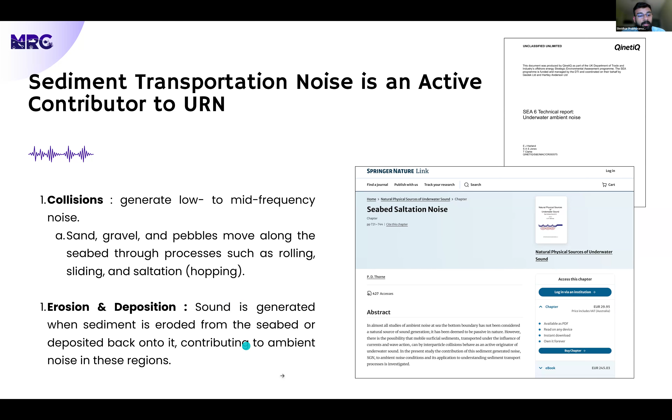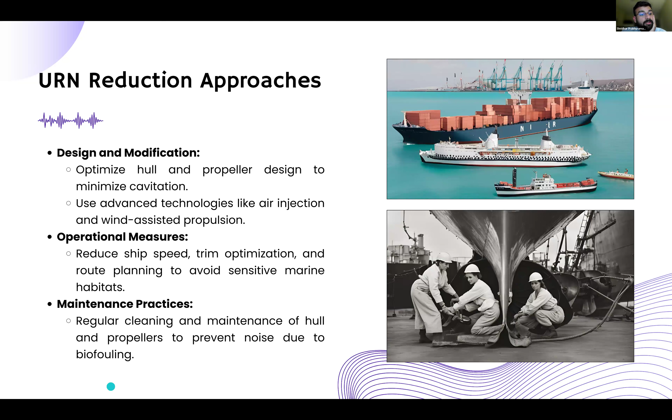There are a lot of URN reduction approaches that have been provided by IMO. The idea is that you perform modifications to your hull, take operational measures such as reduced ship speed, trim optimization, and route planning to avoid sensitive marine habitats.

Now, everyone is talking about how we can decrease the noise level. But to be honest, if you're a stakeholder, say a ship owner, you wouldn't actually care about the amount of noise being generated. If slow steaming means reducing the speed of the ship and reaching your destination late, you're not going to worry too much about the noise generated in the ocean. You're going to go full speed and not take that into consideration.

So a lot of these policies we showcase also look at how we can create a win-win situation, which is extremely important. If you want to create a policy, you need to make sure the stakeholder is going to win in that situation. For example, with cavitation reduction, or adding adjustments to the cavity propellers so the noise generated is less, or how to make them slow steam.

Slow steaming is essentially like driving your vehicle in economy speed. If you keep driving at a speed of 40, it creates less noise. But what we promote is that this also increases the fuel efficiency of your vessel, creating a win-win situation - you're reducing cost and reducing the noise level in the region. That's the kind of incentive we provide to push the policy of slow steaming and everything.

So, to summarize everything, managing underwater radiated noise is a difficult task. There is variable sound propagation, the ocean conditions are dynamic, the noise sources are diverse, and there are a lot of financial constraints we need to look at. So how do we go about solving these challenges?

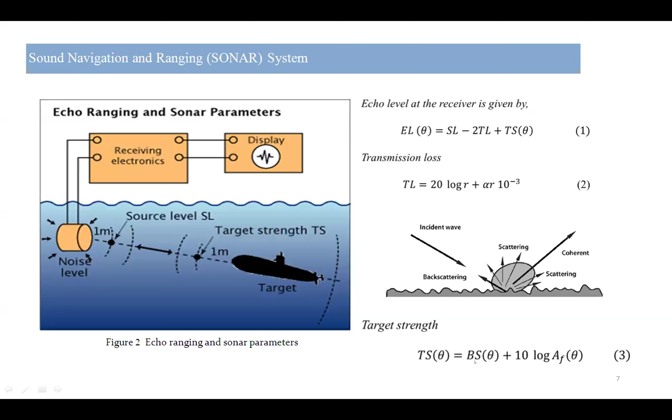Next we have the multi-beam echo sounder. It has multiple beams which cover more portion of the seabed or river bed. So it will have a larger swath width compared to the single beam echo sounder. Both single beam and multi-beam echo sounders give you a 1D signal.

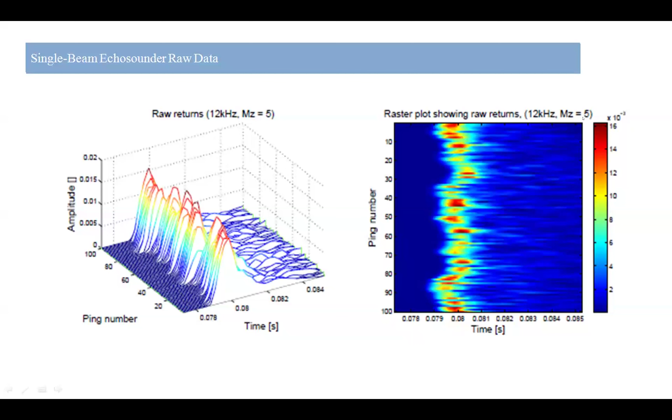So the same thing has been shown here, but it is a raster plot. The same parameters - you have the ping number, the time, and you can see the amplitude. This has been captured at 12 kilohertz frequency. MZ indicates the grain size. Sediment can be silt, clay, or stone, so MZ will indicate what type of sediment it is. It is a mean grain size, measured in millimeters, diameter in millimeters.

Moving ahead, Shridhar has already covered salinity and temperature. Temperature plays an important role because sound speed underwater is directly proportional to temperature, pressure, and salinity. For 1 degree change in temperature, the sound speed changes by 4 meters per second, while for one part per thousand change in salinity, it changes by only 1.4 meters per second. And pressure per 100 meters changes it by 1.7 meters per second. So the dominating factor is temperature. When you go into the sea, salinity will also play an important role, and when you go deeper, pressure becomes the dominating factor.

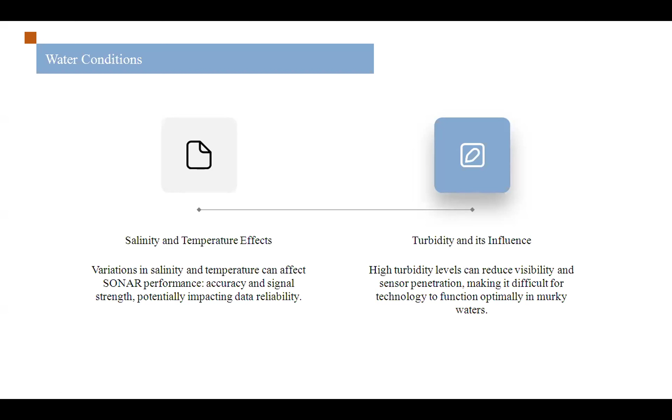Turbidity also has been discussed by Shridhar, so I will not invest time on that - I will just move ahead. This part also has been elaborated.

Now particularly I'm addressing a case study targeting fresh water. We know our country comes under a tropical region. There are regions which are tropical, temperate, semi-tropical. What is a tropical region? It is characterized by seasonal and diurnal variations in temperature - we can feel the temperature varying seasonally, as well as during a day we can experience changes in temperature. We are in the tropical Pune region particularly, so Pune comes under a tropical region.

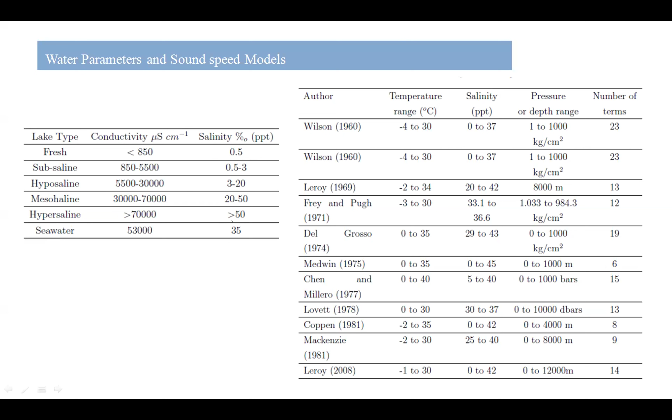All those things are listed here. Since we are working in fresh water, I have limited my scope to freshwater lakes, not even to rivers, just freshwater lakes. Here I have listed the lake types, the conductivity, and the salinity. For freshwater, the salinity is about 0.5, typical value 0.5 parts per thousand, very less. When you go for sea water, it touches 35 parts per thousand.

Now I will highlight a real case study that we have undertaken at Khadakwasla Lake. My PhD was on the characterization of tropical freshwater lake systems. In the further presentation I will be listing the study of the freshwater environment, the sound speed, a computationally efficient sound speed model we have designed, the underwater channel impulse response for freshwater, and what type of sediments are there in Khadakwasla Lake. My presentation will move ahead with a wake-up call on reservoir siltation.

As we know, Indian rivers particularly suffer from heavy deposition of sediments, and as sediment deposition increases, the live storage of the reservoir goes down. The Indian government is facing a severe problem of sediment deposition, causing a huge scarcity of fresh water. This is an alarming situation for all of us, as siltation is going on day by day. Literature suggests that 1% of the water storage capacity of global reservoirs is being wasted annually - imagine, 1% capacity lost every year.

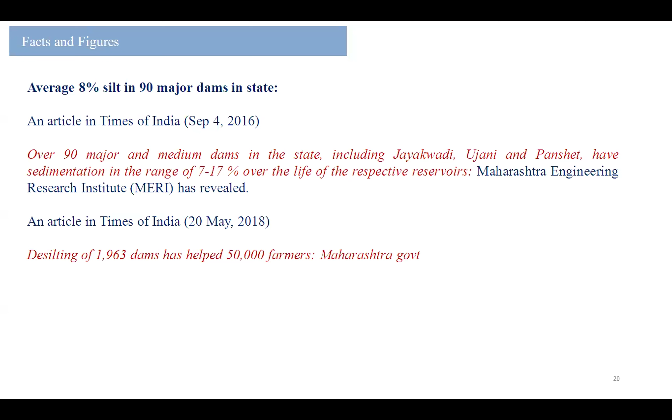There was an article that the Maharashtra government has decided they will start removing silt from 314 sites across the state. This was an article in 2017, and the Maharashtra government has already started taking steps in that direction. But how will acoustic techniques help understand the sediment class before dredging activities? Sediment classification needs to be done, and based on that, whatever investment is done to deploy the dredgers has to be systematically planned.

For Khadakwasla Lake, our objective was to analyze the freshwater channel - the sound speed profile at the freshwater channel, the channel impulse response, the statistical behavior - how is the PDF, probability distribution function, density function of the underwater channel at Khadakwasla Lake, and what type of sediments are there in Khadakwasla. That was our objective.

We conducted this experiment in 2017 for complete 2 days. We deployed 3 sonars underwater, and thanks to my guide, Dr. Commander Arnab Das - because of him only, because when you plan such an experiment you need huge support, financial support, as well as all the government official formalities you have to complete. So I'm very much thankful to Maritime Research Center. Because of their support only, I could progress further in my research work.

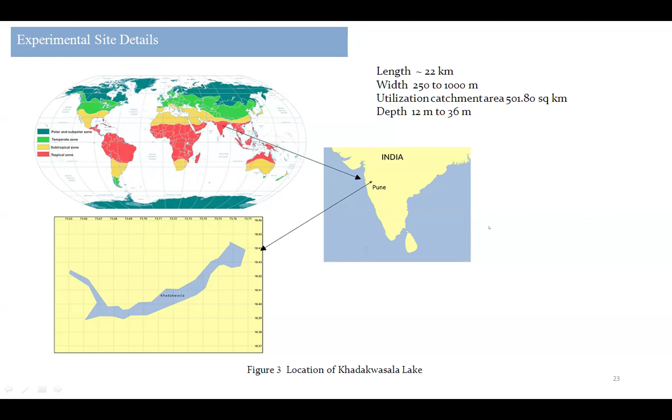So why have we selected this lake? It was not because it was near us. We selected this lake because it represents a tropical environment where you can see seasonal and diurnal variations in temperature, and those variations we can capture and apply as corrections in our algorithm.

When I started my research, there was nothing in the open source domain where I could capture the temperature and salinity data. CWPRS had done limited studies at Khadakwasla Lake, but they did not have the dataset readily available, so I had no alternative but to conduct this particular experiment.

So I will show you the profile of temperature from January to December, how the surface temperature of water is and how the bottom temperature is.

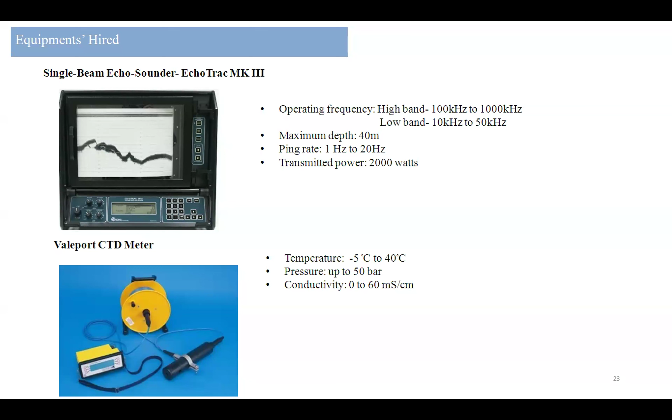What we did: we deployed three sonars, as I mentioned earlier. The first sonar was a single beam echo sounder that we utilized for calculating the speed of sound underwater. Then we had the CTD meter, and we collected CTD parameters. Here you can see the experimental setup.

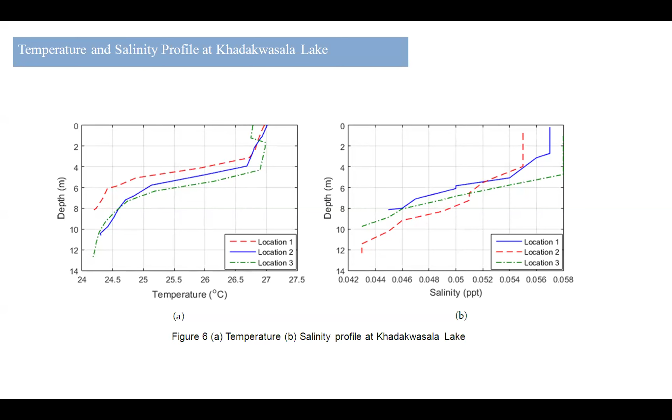The salinity we captured showed that the lake is very fresh water. We found the salinity in the range from 0.043 ppt to 0.058. After this, using all the models I mentioned earlier - Wilson, Coppen, Leroy, Medwin - we calculated the sound speed profile.

Whatever we saw in theoretical figures, we could replicate here in practice. These are the results from Khadakwasla Lake for the sound speed profile.

Then we deployed the third sonar, which is called the sub-bottom profiler. So what is a sub-bottom profiler? I will take you to the next slide.

What a sub-bottom profiler does is give you the stratigraphy of a sediment column. Meaning, along the sediment column, if I have say 15 meters of sediment layer, then within that 15 meter layer, what is the morphology of layer 1? In short, what is the morphology - whether it's mud, silt, sand - and what is the second layer's morphology.

You can see this only by utilizing the sub-bottom profiler. The ultimate aim of utilizing it is that it will penetrate into the deep sediment layer, and along the sediment column you can analyze the stratigraphy and the class of sediment. This is very important when doing any underwater construction, because before laying underwater lines or cables, we have to analyze the stratigraphy of the sediment.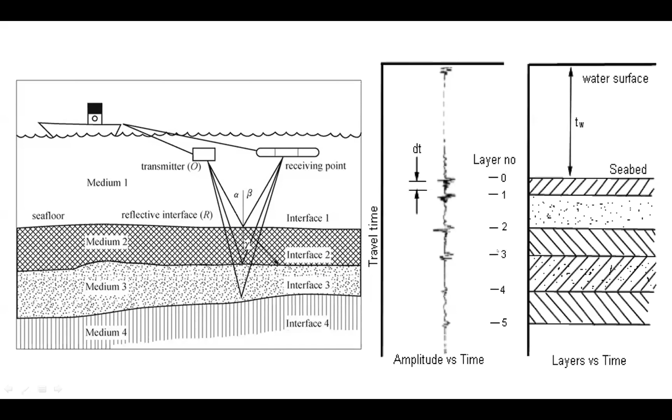So I will show you a sample signal that we acquired from the sub-bottom profiler. You can see these are the signals that we have captured.

Here are the reflected signals from the sub-bottom profiler. You can analyze this signal in parts, like the pulse duration that we have transmitted. We transmitted an acoustic pulse for 10 millisecond duration, so you can analyze the reflected signal in that same duration. From that, you can analyze the energy of that signal.

We have utilized a model-based technique where we calculate the energy of the signal and map that energy to a well-known model in underwater acoustics called the Hamilton model. The Hamilton model gives me the reflection coefficients from the energy. These are the sample signals.

The next one was side scan sonar. As I told you, it gives you the image of the sediment surface, but it will not go deep into the sediment layer. It gives only the sediment surface.

It operates in a dual frequency range. 400 kilohertz is the lower frequency, and the high frequency is 900 kilohertz. With 400 kilohertz you can have a crude view, and with 900 kilohertz you can have a detailed view of the sediment samples.

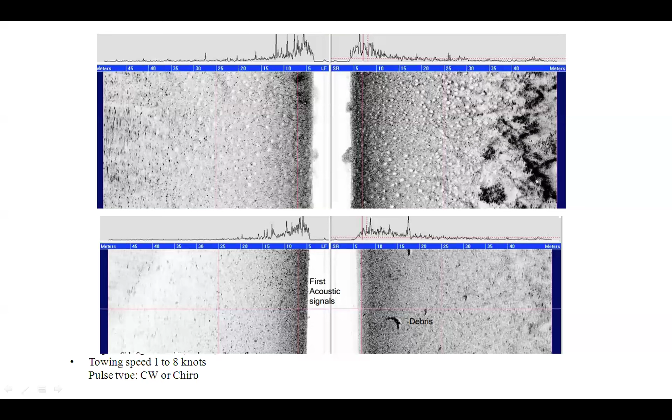See here, these are the sample images that we have collected. This is the sediment surface of Khadakwasla Lake, and the image is formed by that side scan sonar. Whatever dark portion is there indicates sediments with very high reflectivity.

This covers the sediment which has low reflectivity, like clay and mud. Here you can consider this as sand, or there might also be stones. So this is how we have captured the data.

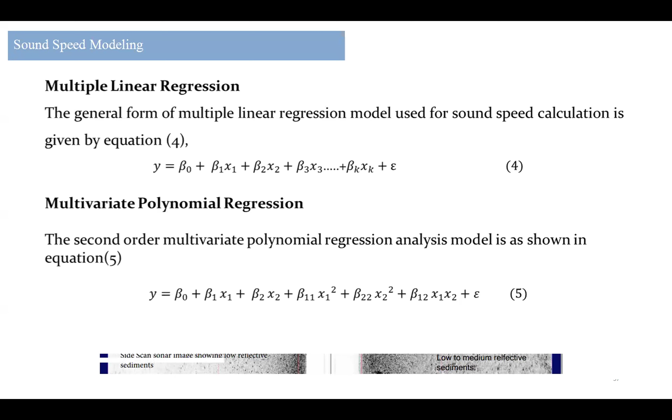After that, we worked on designing an efficient model for sound speed, particularly for freshwater. We designed two models: one is a simple linear regression / multiple linear regression model, and the other is a multivariate polynomial regression model. We have also done the statistical performance analysis of the models that we developed.

I will show you the equation that we derived. This is the equation we designed for calculating the sound speed in a freshwater lake, with inputs as salinity, pressure, and temperature. This was the simple model that we formed here.

After that, we also formed a polynomial regression model, and we checked how well the model we proposed fits the data. For that purpose we did some statistical measures. All the coefficients that we calculated, that our model gives, fit the real data with 95% confidence.

When you go with regression analysis, you should also ensure your model is not overfitting the data. For that purpose we calculated the p-value of the regression coefficients and performed hypothesis testing. The p-value we found was 0.001, which is much less than the alpha value at the 95% confidence level we are calculating.

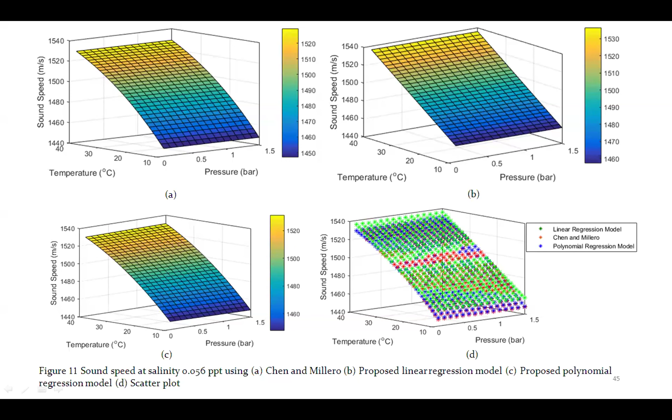Since we collected only limited samples from the Khadakwasla lake, we also did validation, because we conducted the experiment for only 2 days and collected only 200 CTD samples. These 200 CTD samples won't cover the entire temperature or pressure range of the lake. So for that purpose, we did the validity of our model for the temperature range from 10 to 40 degrees Celsius, and for depth up to 15 meters. For these conditions, our model was working very fine, giving an RMS value of 0.5 meters per second.

So our next target was to calculate the channel impulse response.

As we know, the underwater channel impulse response is very random and very site specific, meaning the channel impulse response of one sea might be different from another sea where you do the experiment. You might be aware that there exist many channel models for RF wireless communication, with renowned models like Rice distribution and Rayleigh distribution being very popular. But when we talk about underwater communication, we can never rely on a single statistical model.

Many authors have reported many distributions. Some reported that at their site the impulse response follows the Ricean distribution, others reported the K distribution. So what we did was study how the channel impulse response behaves at the freshwater lake Khadakwasla.

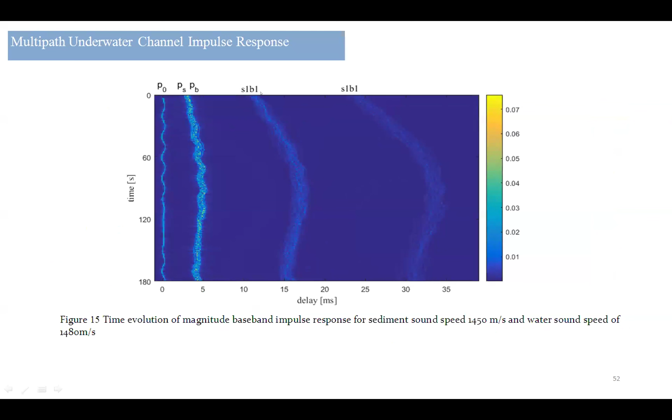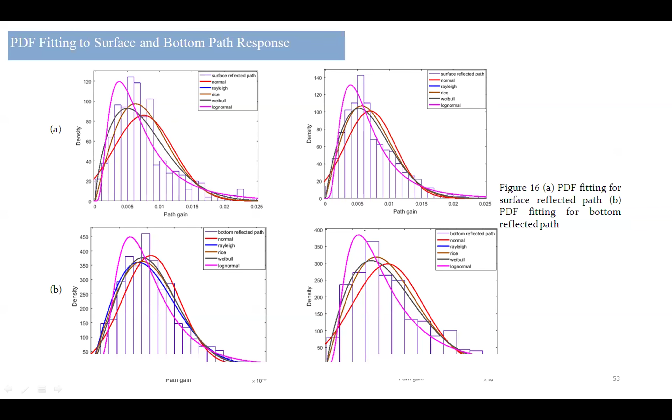So what we did, we tried to fit the PDF, probability density functions. As the literature suggested that Rayleigh and Rician fits well for many of the signals. But here, what we observed is that we have fitted this PDF for surface reflected path as well as for bottom reflected path. Only a few samples I have shown, but we have done it for 100 signals. So we came to a conclusion that we want to know which PDF fits well to my data.

So we have done the KS goodness of fit test. Many goodness of fit tests are there, but we have selected one sample test of KS goodness of fit.

So what we are doing here, we are comparing the distribution of observed data with a specific distribution. Whether my data follows Weibull distribution, normal distribution, or log normal distribution, we have done that. So this D gives us the difference between the theoretical CDF that we have assumed and actual CDF of the data. So these statistics we need to compare, and there is a standard way that you have to compare it with a critical value alpha.

So alpha you can take any value. We have taken 0.05, but you can take 0.01 also. It will tell you what is the significance level with which you are proving your statement that your data follows a particular distribution, right?

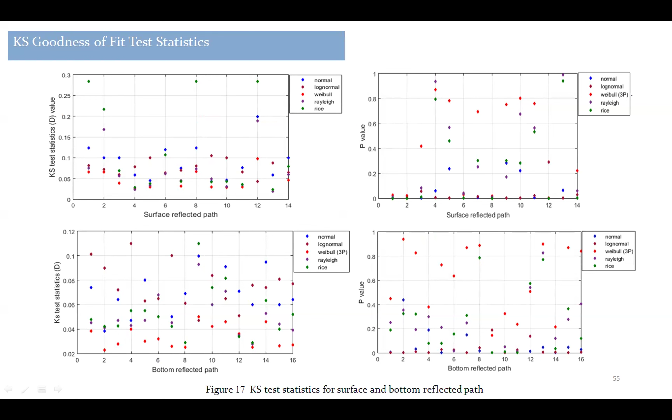So we did this KS statistic test, and we observed that whatever is the channel impulse response, it follows a Weibull 3P distribution. 3P stands for 3 parameter. It considers scale, location, and shape. So Weibull distribution fits the channel impulse response with a confidence level of 95%. Others fit, but they don't give the optimum performance. Weibull distribution has given the best performance for the data that we have captured.

So the last point of my presentation is talking about what is the sediment type at Khadakwasla Lake. When we talk about sediment classification, there are two approaches. One is you can use model-based techniques for sediment classification, or you can use empirical techniques. When you go with empirical techniques, you need to have a huge amount of data with you which has been tagged already - this is sand, this sample is of sand, this sample is of silt. But getting this sort of data is a very tedious job when you consider an underwater experiment.

So what we did, we used the model-based technique, and we have used the reflection coefficient and frequency shift model to check what type of sediment is there underwater.

So this is the energy model. Transmitted energy, received energy is a function of transmitted energy. R square is the reflection coefficient here. This is alpha, that is absorption coefficient, and height, that is water depth. So we know the received energy, we know the transmitted energy. We can calculate alpha value based on what is the distance between transmitter and receiver, and from that we can calculate R square. From that we can calculate R.

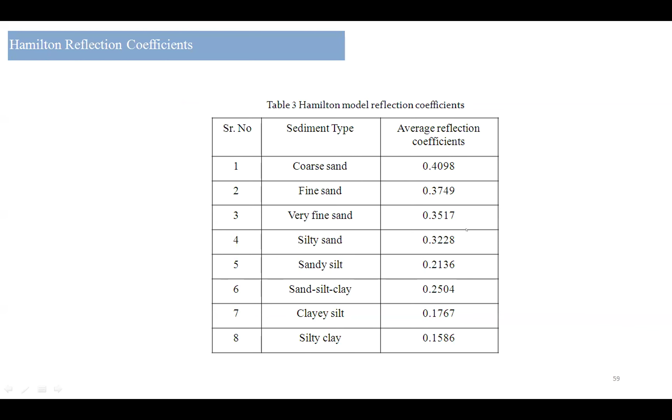Then another model we have selected - one time domain model we selected and one frequency domain model we have selected for this case study. So we have also selected a relaxation time model. This relaxation time model talks about the rate of change of frequency along the sediment layer. How is the instantaneous frequency, to be very specific, how is the change in the instantaneous frequency of the signal as the sound travels inside the sediment?

So for that purpose, here this is a sample signal. This we have captured from Khadakwasla Lake. So this is a sample signal of sub-bottom profiler, because we now want to know the sediment type. So along the sediment column, the transmitted pulse is a Gaussian pulse, that is a chirp signal in the range 2 to 10 kilohertz. The pulse duration was 20 milliseconds and the pulse power was 210 dB. Whatever signal we get from the sub-bottom profiler is in analytical form.

Analytical form means you will have a real part of the signal and an imaginary part of the signal. The imaginary part is itself a Hilbert transform, which gives you the instantaneous frequency of the signal. So I will show you the instantaneous frequency here.

So we observed and plotted the shift. We did the simulation on real data, working on sites S1 to S5 in Khadakwasla Lake itself. At various sites, the central frequency shift was from 5 hertz per meter to 15 hertz per meter, corresponding to a relaxation time of 0.02 to 0.06 microseconds. This relaxation time corresponds to sediment types: clay, fine silt, and medium silt respectively.

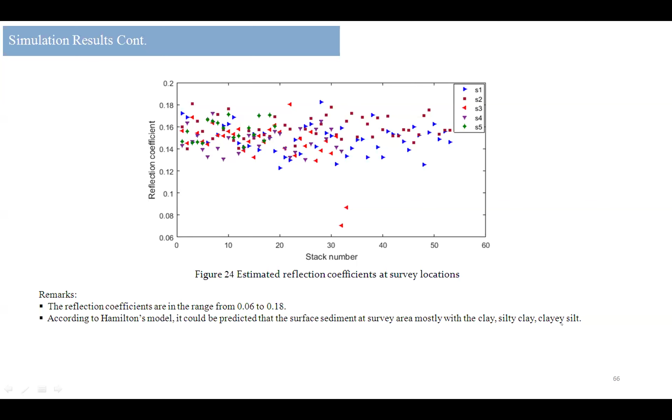Here I have plotted the reflection coefficients. By that method also, we confirmed that the lake was having clay, silty clay, and clayey silt as sediment types. So we verified by both methods.

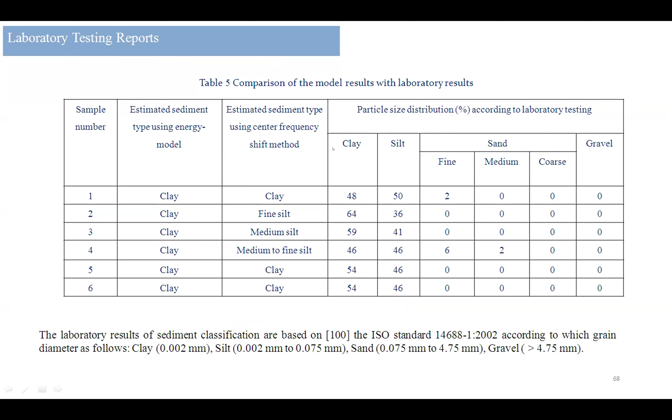So this completes my part, but what will be the research and development in this field ahead? As we know, AI has become a buzzword now, machine learning and artificial intelligence. It has also touched to a great extent underwater acoustic applications.

For marine population detection, acoustic monitoring, seafloor mapping, underwater surveillance, pipeline and infrastructure inspection, aquatic life monitoring - we can utilize artificial intelligence and machine learning techniques for all these applications.

So what is the challenge? The most important challenge here is that data is not available. When you go to the sea, data is available, but what location you select depends on that. But when you go for fresh water, literally no data is available in the open source domain. So data scarcity is the most important challenge when working in this field.

When we talk about machine learning and artificial intelligence, we highly require labeled data, right? But when we don't have labeled data, how can we validate our model? That is a question. And when you decide to collect the data, it is a very costly affair.